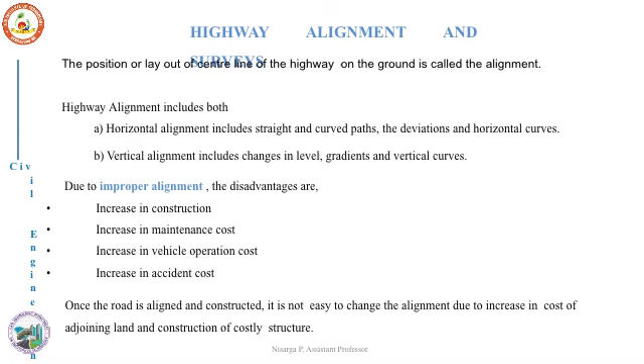And we should keep in mind that once the road has been constructed, it is very difficult to change the alignment in the later stages. So before we plan for any highway network, the first and foremost thing is we have to fix the alignment. And when we fix any alignment, it should possess some requirements: the alignment should be short, easy, safe, and economical.

Connecting between any 2 points, we should always choose the short alignment, the shortest distance between the two terminal stations. It should be easy in terms of construction difficulty, easy for construction, easy for maintenance, and it has to be safe from the operation point of view. And overall economy should be maintained. Economy includes the initial cost of construction, maintenance, and vehicle operation cost. All these costs must be kept as minimum as possible.

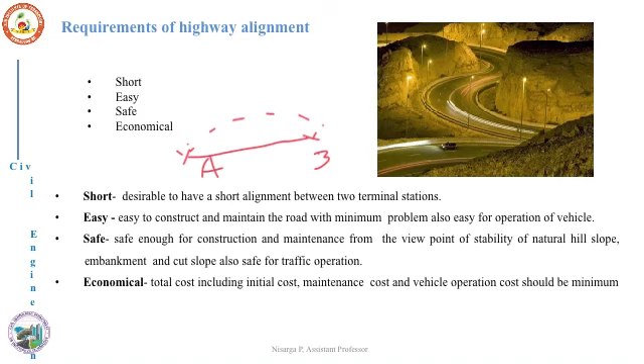When we consider any 2 points, point A and point B, the straight line alignment between the 2 points will always be the shortest one. But sometimes because of some considerations, we may need to deviate the alignment from the shortest path. Those points which deviate the alignment from the shortest path are termed obligatory points. There are also other factors which control the alignment, including traffic, geometric design, economics, and other considerations. These are some of the factors you need to keep in mind when we provide any alignment.

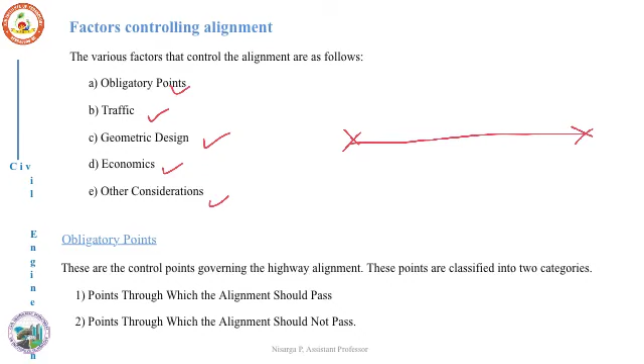Alignment, again I repeat, is the positioning of the center line of the highway. Once you mark the center line, your road will be extended on either side depending upon the width of the road. If you are constructing a 7 meter road, we will construct a single lane on either side of the alignment. So if you provide 2 lanes, the number of lanes can be extended depending upon the width of the road.

So when we provide the alignment, some of the important factors which need to be considered are the obligatory points, traffic, geometric design, economy, and other considerations. We'll take them up one by one and see how they control the alignment. The first one is the obligatory points. As I mentioned earlier, when we connect any 2 points A and B, the straight line connecting the 2 points will always be the shortest one.

But because of some physical features or barriers, we may have to deviate the alignment from the shortest path, and those points we call obligatory points. Obligatory points can be further divided into points through which the alignment should pass, meaning that though there is an obstruction, it is possible for us to take the alignment through that obstruction, and obligatory points through which your alignment should not pass, because of some consideration it will be impossible for us to take our alignment through that particular point.

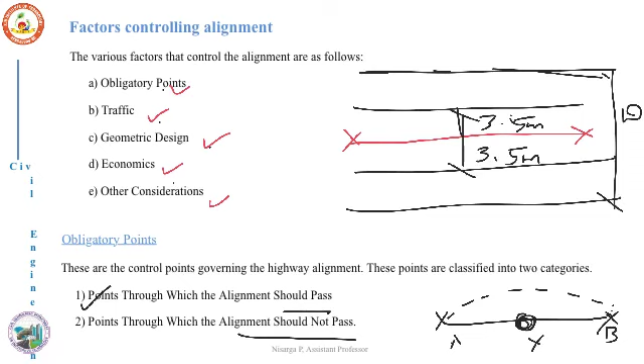So there are some circumstances where you can take your alignment, but still we don't take a risk and we will deviate the alignment from the shortest path. Some typical examples: let us see here, the first example, alignment along the hillside pass. You can notice here we have two points, A and B.

This dotted line here indicates the shortest path for the alignment. If you want to take your alignment through this, it is possible. Only thing is, a tunnel has to be there. You can see from the contours there is a hillside pass. You can dig a tunnel and take the alignment through the hill, but the construction cost will be more. The tunneling operation has to be done.

Providing a tunnel is a difficult task, and also from the safety point of view we will avoid this; although it is possible, the alignment is avoided at that particular point. So instead of selecting the shortest path, we choose the other alternative, where you don't require any tunneling or blasting operation. Without doing that, it is possible for us to connect.

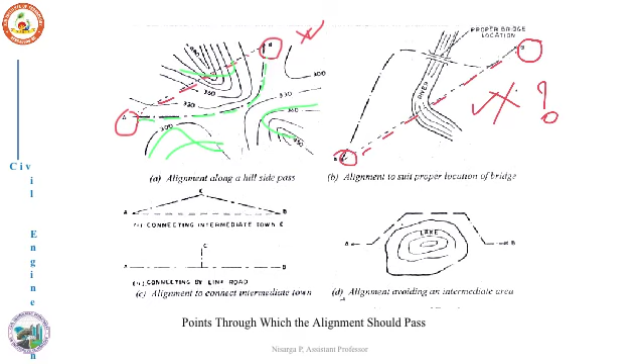What is the reason? When the alignment has to pass through the river, it is essential to construct a bridge. But we have to first check whether this place is suitable for providing a bridge or not. Generally, we avoid positioning the bridge at a river bend. You can see there is a bend in this river at this location. So when the bridge site is selected, we will keep it away from the river bend.

So we are constructing the bridge away from that river bend, and you can deviate the alignment of the road. Here also we can take the alignment through this point, but we are avoiding it because this is not a proper location for the bridge.

Another example is the alignment to connect an intermediate town. A and B are two major cities which need to be connected. C is another place in between A and B; let us consider C is also an important city that needs to be connected. The best example is connecting Bangalore to Mysore. In between we have district headquarters like Ramanagara or Mandya. You cannot construct a bypass between Bangalore and Mysore without giving connectivity to Mandya or other important cities.

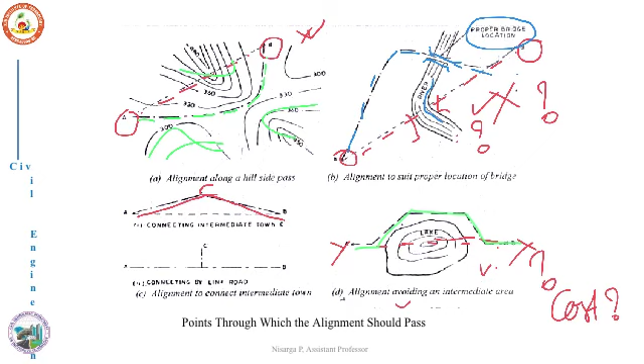But once again, what will be the cost if you construct a bridge across a lake? So instead, it is more convenient to take your alignment around the lake, so it may avoid the additional bridge construction at that location.

Okay, so these are some of the examples of obligatory points through which you can take your alignment, but we are deviating the alignment from that point because of some consideration. That consideration can be avoiding construction through the hills, avoiding bridge construction at the river bend, giving connectivity to the important city, and avoiding unnecessary construction of the bridge at the lake portion.

And we have certain obligatory points through which it is impossible to take the alignment. In these examples, it is possible, but we are avoiding it because of some practical consideration. I'll take another example here. We have two points A and B. Let us say I have a temple here, or some building like the Taj Mahal. Is it possible to take an alignment through the Taj Mahal?

If we want to take any alignment there, you have to demolish that and construct your road. Will anyone permit you to demolish the Taj Mahal? Or if you have any important monuments or place of worship, let us say a mosque, a temple or a church in between, such points are very sensitive points. It is better to avoid them. If possibilities are there, always choose the region in which you can bypass those points and construct your road. Those are the obligatory points through which your alignment should never pass.

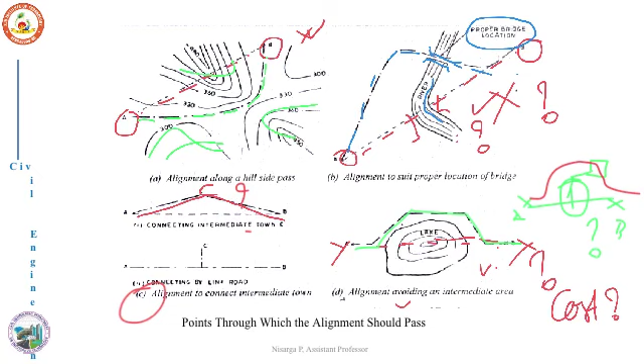Like in this example, considering the importance of the city, we are connecting C also with A and B.

The other factor controlling the alignment is the traffic pattern. Before you give connectivity between any two points A and B, you need to thoroughly conduct the origin and destination survey and plot the desire line diagrams. Based upon the requirement, if it is required to connect any point in between, consideration has to be given. O&D studies will be conducted to decide the better alignment to connect the two end points.

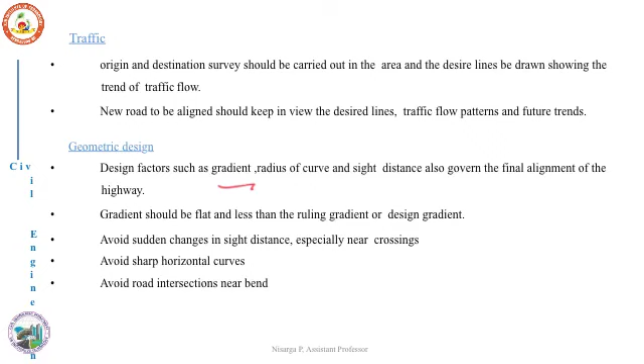Also the geometric design has to be considered: the gradient, the radius of any horizontal curves, and sight distance will also be taken into consideration while aligning the road. As far as possible, the gradient should be flat and not more than the ruling gradient. Any sudden changes in sight distance have to be avoided, especially near crossings. Try to avoid sharp curves and road intersections near curves.

And the alignment we finalize should be economical. That means the cost, including the initial cost of construction, maintenance cost and operation cost, should be as low as possible. Another consideration to keep in mind while aligning the road is drainage. Drainage is a very important aspect for long-term performance of the road.

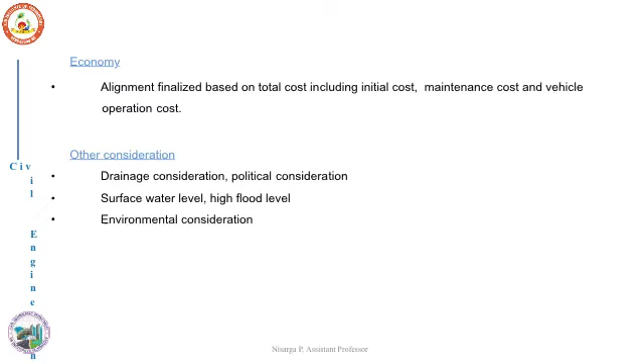Drainage is very important, and we have to look into the political considerations, flood level, and the environment. The alignment you take should cause minimum disturbance to the environment. Considering all these points, choose the one alignment which is best with respect to all the points we have discussed. Thank you.